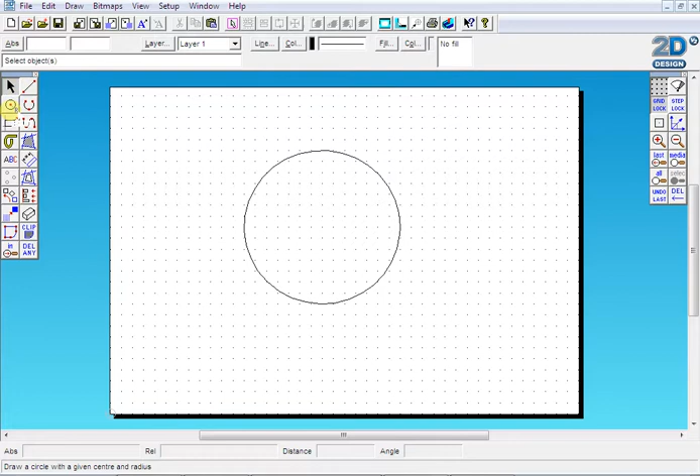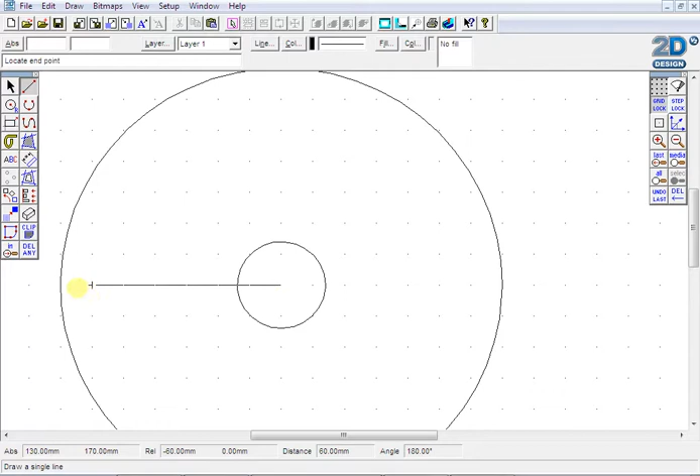Okay. Go back to the select tool and then back to the circle tool. Change this radius to 14. Click OK, and position that second circle in the center there. Okay, excellent. Zoom in to your page, and draw a single line from the center of your circle to the left hand side of that larger circle.

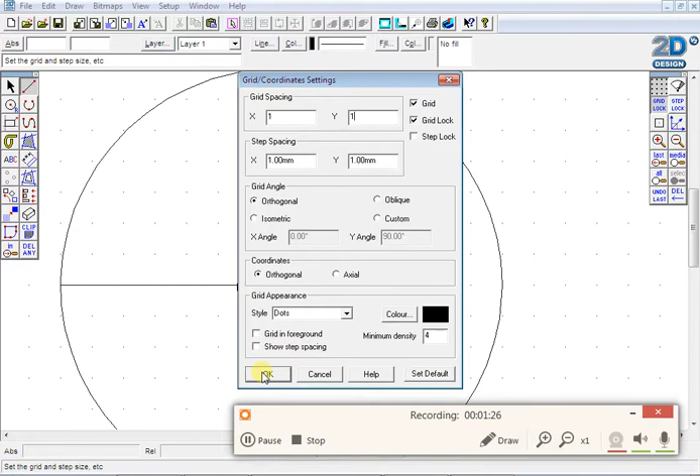Okay, right click the grid. Change the grid spacing to 1mm spacing for X and 1mm spacing for Y. Click OK. You've now got a smaller grid. Let's zoom in even further, and just scroll across here.

At the edge of your circle, let's draw a line that is 15mm long, and you can see at the bottom of your page here the distance between that first click and where your cursor is currently. Find 15, press enter. And then from that point I'd like you to come up 1.5mm. At the moment the grid won't allow you to do that.

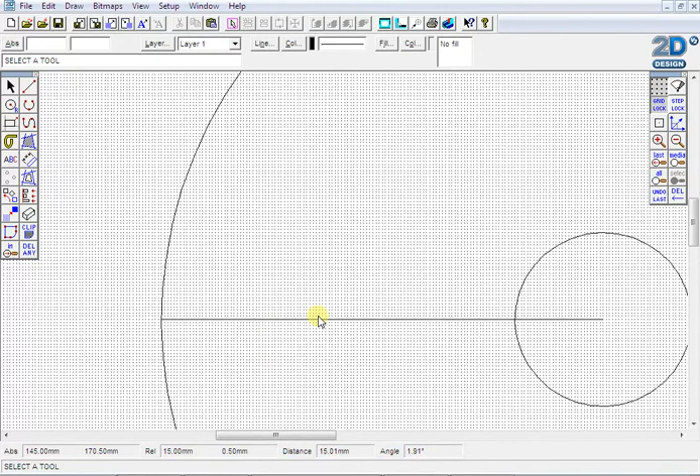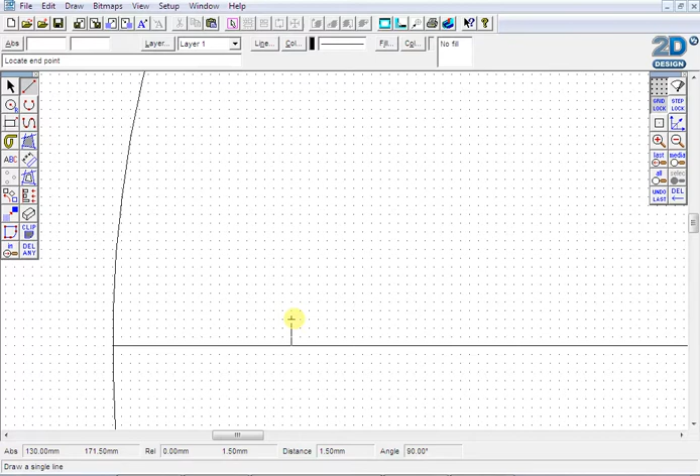So we can change the grid spacing by right clicking the grid, changing the grid spacing to 0.5mm. Finding where that line is that we have just drawn, which is there. Let's zoom in to where the end of that line is, which is here. I'm just going to place my finger on the screen to locate that point, and then I'll come up by 1.5mm and click again to draw that across.

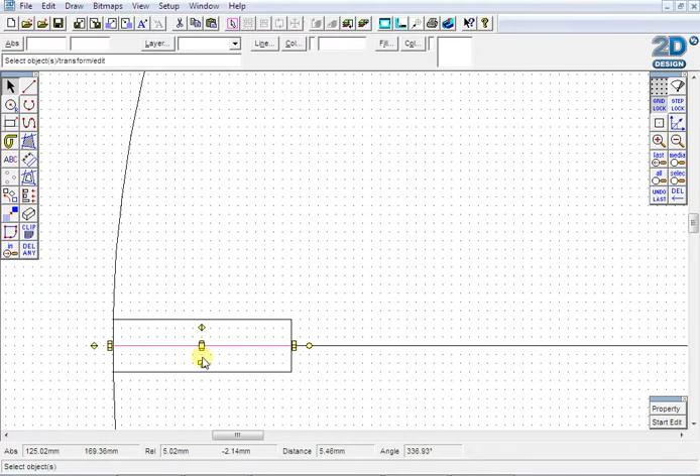We can then go back to the selection tool, select that area, and copy and paste it. So Control C with it selected, and Control V pastes it. Move that just the other side of that horizontal line, like so, and that is your first slot. We can just single up that central line there, delete until we've just got that horizontal.

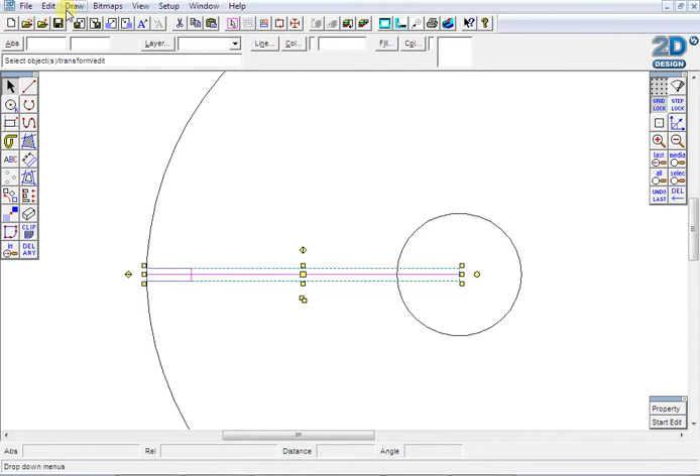Now let's copy. Well, let's first group. So edit, group with that part selected. Then we need to copy and paste that all the way around your circle, and a great way of doing that is going to the draw tool, transform, rotate. Angular rotation should be 30 degrees, and that will enable you to have 12 segments within the 360 degrees.

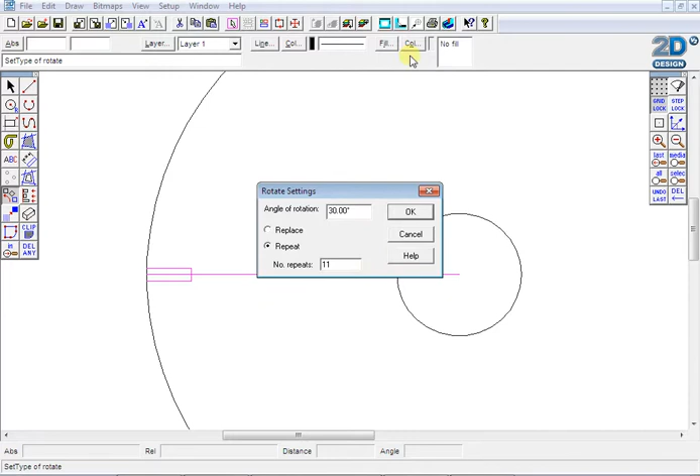And we are going to repeat this shape 11 times to go all the way around, because we've already got one component there. Click OK. Zoom in to that central part and click, and you'll see that that piece is copied and pasted all the way around.

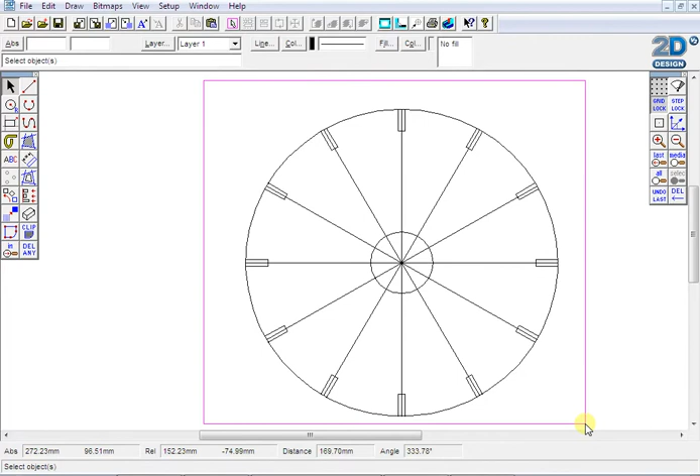You have to delete these lines that we no longer need. They're just there to construct your drawing, but you will need to ungroup those lines. So let's select everything, edit, ungroup, and then we can delete those central lines. So we come around, I'm just clicking it and deleting on my keyboard. Zoom out a little bit so you can see everything.

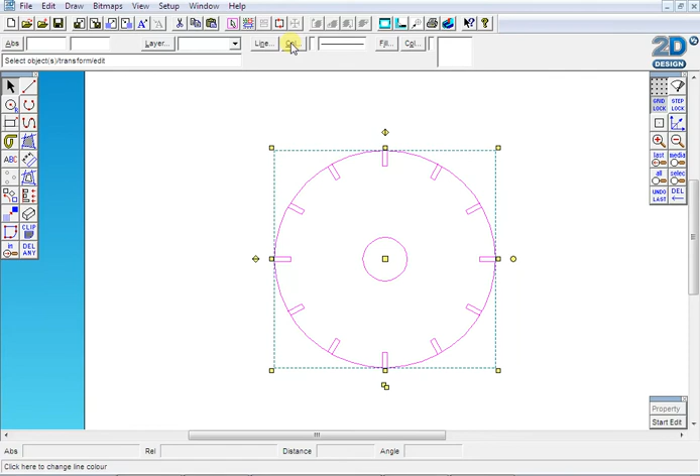Make your selection of the overall design. Change the line width to fine, the color to red, and there you have it, your design for your laser-cut card component that will hold whatever you slot into it for your shade. Okay, and that's it.